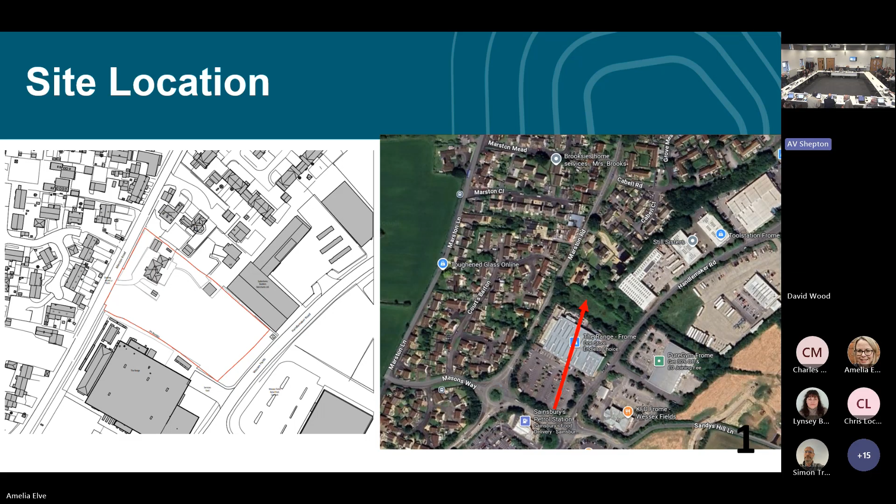In terms of the history of the application, there has been a 2-stage pre-app advice approach taken. The first response related to principle of development, and it was set out that the proposal could be supported as a care home use, would generate jobs, and that any application made should set out the scale of job creation that would arise from the proposal. Additionally, it was confirmed that bed spaces would count towards the 5-year housing land supply.

The second pre-app related to design, amenity and landscaping. Comments from the placemaking team were provided setting out that consideration should be given in respect of the building being fit for purpose, and that the design of the building could be improved through material finishes and form to reduce massing.

Following the pre-app advice, the proposal has been amended to increase the level of landscaping that is to be provided, particularly along the northern boundary. Additionally, elevations have also been amended to simplify the palette of materials, and there have also been changes to the boundary treatment between the proposal and the residential properties to the north.

So just to confirm, the application seeks consent for the erection of a 76-bed care home with alterations to the existing access.

This slide shows the proposed elevations that would face the boundary shared with the residential dwellings and industrial building. The proposal would be for a 2-storey building, with the central block covering the transition of site levels being 3-storey when viewed from the southeast, but appearing as 2-storey from other directions due to the subterranean basement level. The development is proposed to be finished with buff render and stone with some metal cladding. There are a variety of architectural features included within the design, such as around the windows and a staggering of the building to break up the linear form.

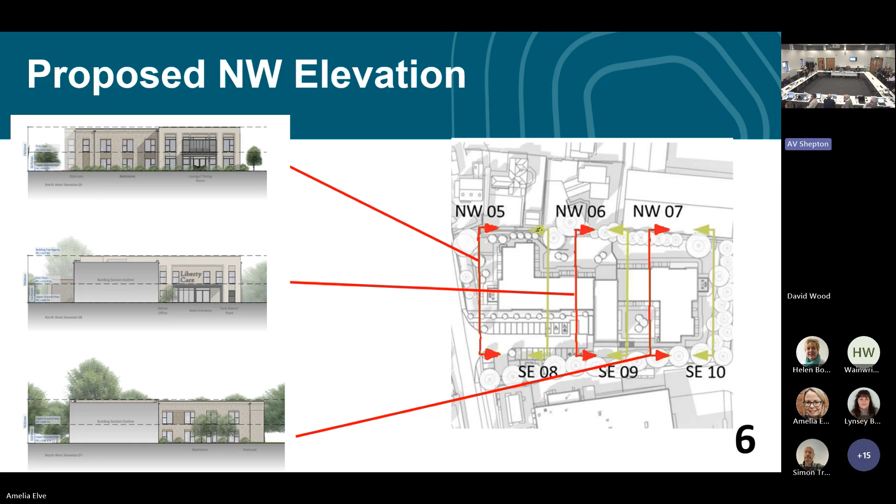This slide shows a series of northwest elevations, from the Marston Road side of the development, showing the staggered layout of the site. The first image is the first view you would see, and then as you move into the site, what you then see. They are sections, so you've got a greyed out area to show where the building form is.

And these are the elevations that face towards the boundary shared with Wessex Fields Road to the southeast. As previously mentioned, the middle elevation is the main view of the 3-storey element, however this is also screened from Wessex Fields given the intervening 2-storey block.

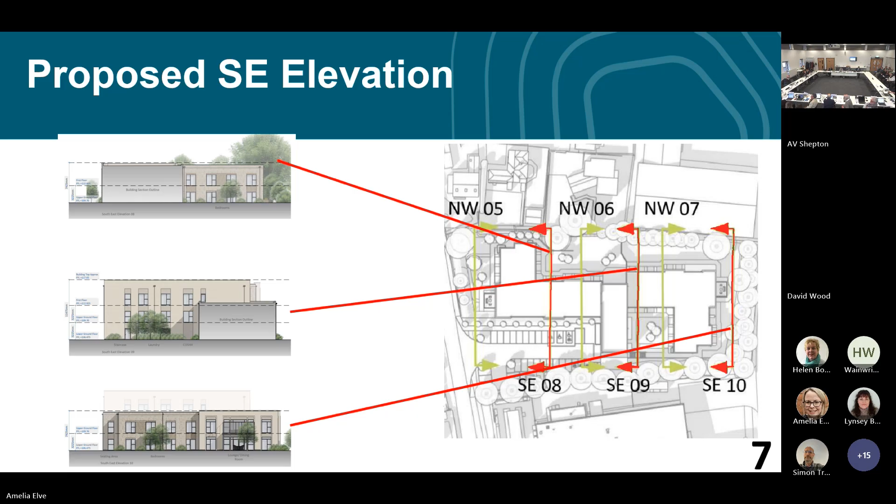We then move on to proposed floor plans. This is the proposed lower ground floor plan that is within the southeast wing of the proposed building. Bedrooms are to be provided along with communal areas and service rooms.

The proposed upper ground floor extends across the entire footprint of the proposed building. Along with bedrooms and communal rooms, a visitor's lounge and residents' shop are also proposed, along with other service rooms such as nurse stations, offices and stores.

And this is the proposed first floor plan, which is located within the northwest wing of the building. Again, communal rooms and bedrooms are provided along with staff rooms.

Site sections have also been provided to demonstrate the site level changes across the site and how the building would be viewed in its context. The two-storey element adjacent to Marston Road would have a maximum height of approximately 7.4 metres, with the two-storey element of the central section having a maximum height of approximately 8 metres. In respect of the southeast two-storey wing, this is proposed to have a maximum height of approximately 7 metres, with the central three-storey element having a max height of 11.25 metres when viewed from that side of the site.

However, as previously set out, this three-storey element is within the main building complex and is therefore well screened from surrounding viewpoints. Also, because of the partial cover over the transition of site levels, it would only be seen as three-storey from that side of that block.

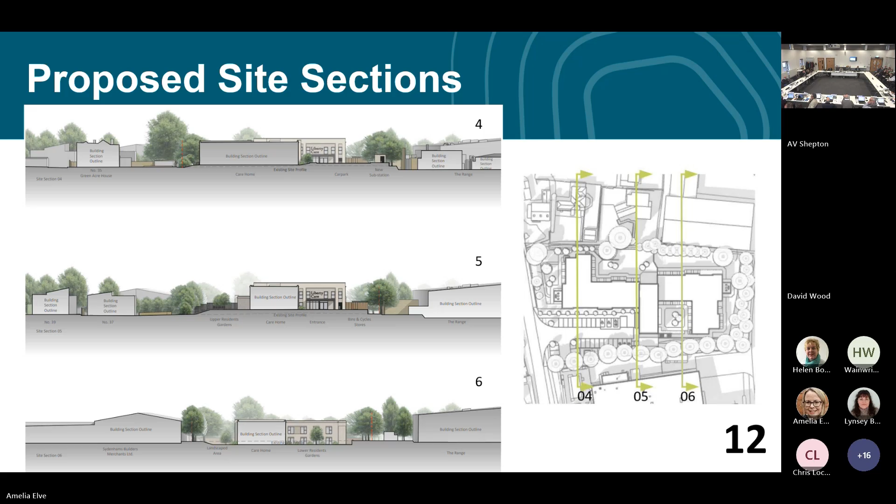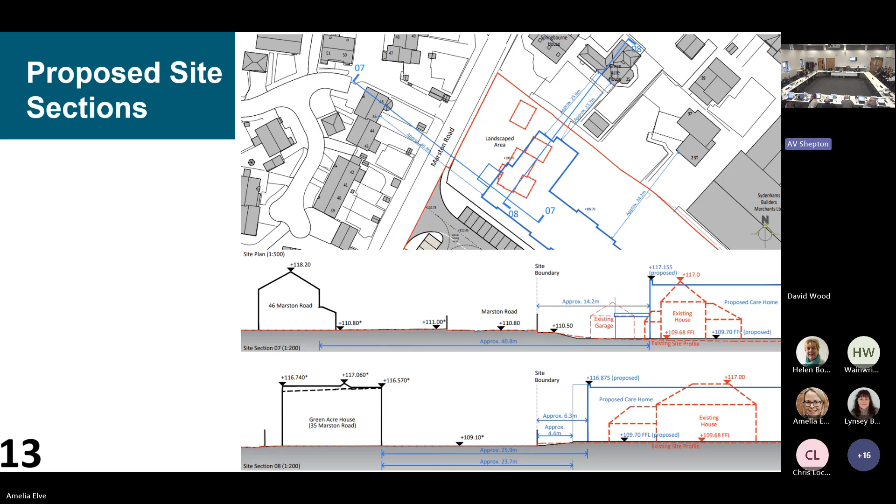Other site sections have also been provided with building heights, including the building height of the existing dwelling, shown in the red dotted line, that is to be demolished. The drawings demonstrate that the proposed building height is comparable to that of the existing dwelling and the surrounding residential properties, both those across the road and next to the site to the north.

Additionally, proposed street scene drawings have also been provided to depict the proposed impact on Marston Road, with the top image showing existing conditions and the bottom one the proposed development.

This is another drawing showing sections to demonstrate how the building would compare to the properties across the road, shown in the top drawing, as if you were on Marston Road looking towards the north. The bottom drawing shows the dwellings adjacent to the site.

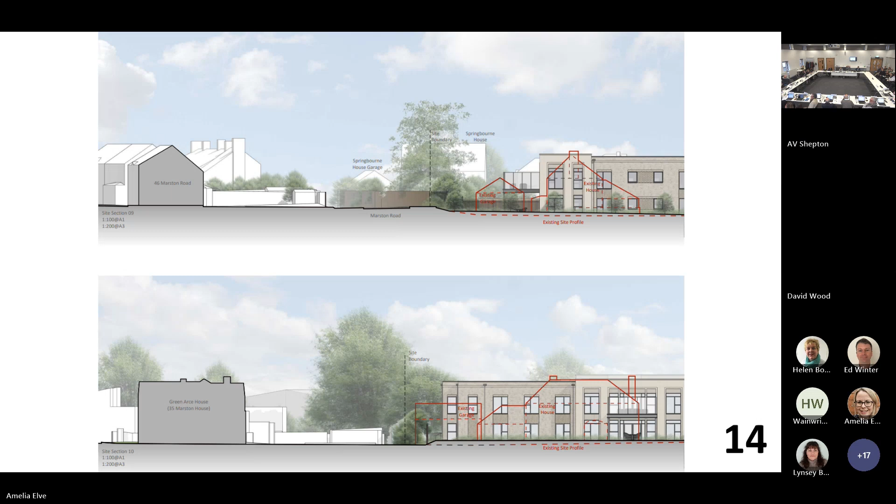We now move on to photos. This is a combination of Google Street View as well as officer photos.

The red arrow indicates the site. You can just about see the house there that is to be demolished for the proposal. This is the view of the approach to the site along Marston Road from the south.

This is as you've gone past the site and turned around to look back. This is the view of the existing site access and the roof of the dwelling that is to be replaced by the proposal.

We now move on to officers' photos. This is the dwelling that is proposed to be demolished.

This is a view in the rear garden of that property looking towards the north and the boundary shared with the residential properties.

This is a view from within the site towards the southeast, towards the more commercial area. A view towards the southern boundary.

And a view from within the site towards the north. Those houses are across the road on Marston Road.

We then got photos as well from neighbouring properties. This is a view from a first floor window of a neighbouring property. The yellow star indicates the property that this photo was taken from.

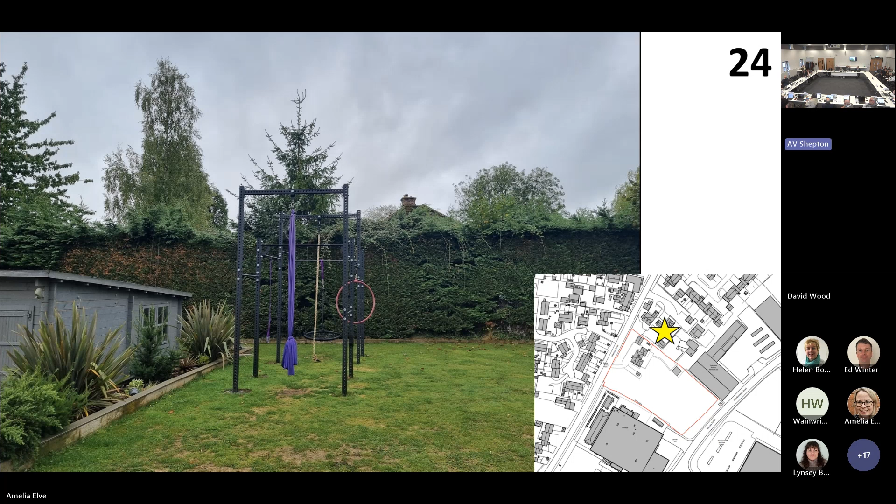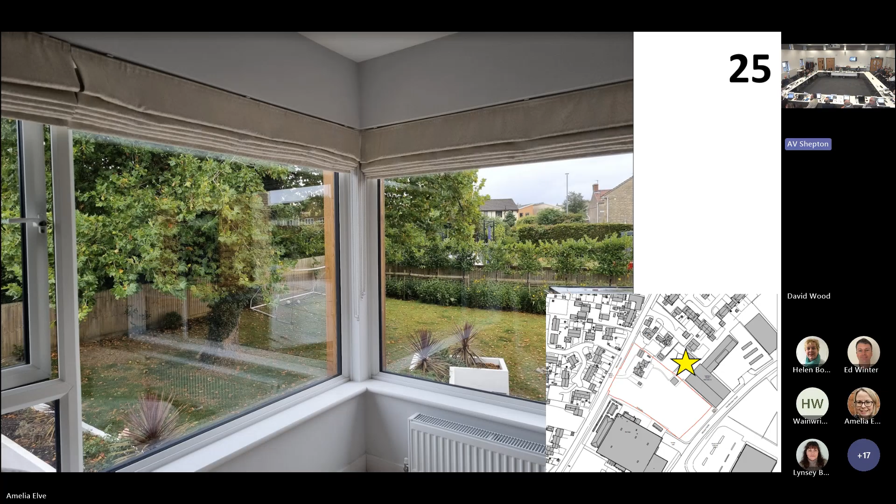This is a view from another first floor window of another property, the next property along. That tree you see in the foreground is protected by a TPO. And then just another view.

And then from the garden of that property as well, again that tree is the same tree that's protected by the TPO.

Considering the principle of development, I've split this into three sections. Local plan policy CP1 sets out that to enable the most sustainable pattern of growth, the majority of development will be directed towards the 5 principal settlements, with Frome being one of these. Additionally, policy DP14 sets out that proposals for care homes or similar specialist accommodation that meets an identified local need will be permitted in accordance with the plan's overall spatial strategy, and that all such development should be accessible and proportionate in scale to the locality.

The application site is within the development limits of Frome. I think that pin's quite small, but it's about there, with the red line being the development limit. It's considered to be in an accessible and sustainable location, and the scale of development is also considered to be acceptable, as set out further in the presentation.

Adult social services have been consulted on the application and considered that the proposal would meet a rising demand for care homes in the area. This is based on current capacities of existing care homes in the vicinity and the demographic of the area relative to the projected growth through to 2035.

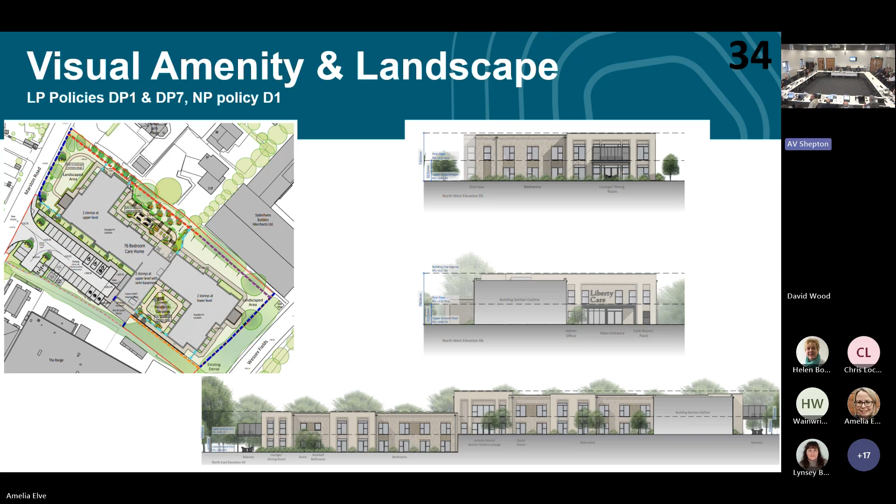Considering further the potential impact on visual amenity, the series of sections provided demonstrate that the proposed height of the building is comparable to the surrounding existing buildings and that of the dwelling that is to be replaced.

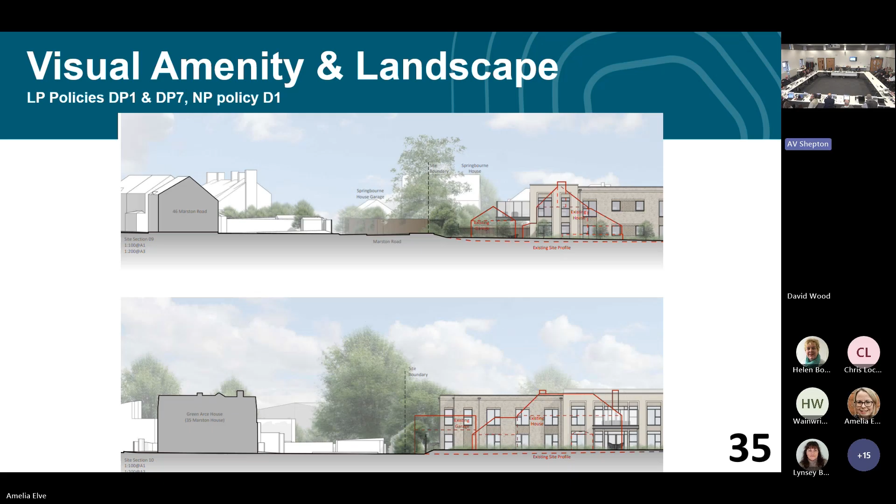Concerns have been raised by some third parties regarding the proposed changes in site levels. Hopefully you can see on the slide that the dotted line is the existing site profile, which gradually decreases as it goes towards Wessex Fields, with the more angular step being the proposed site level.

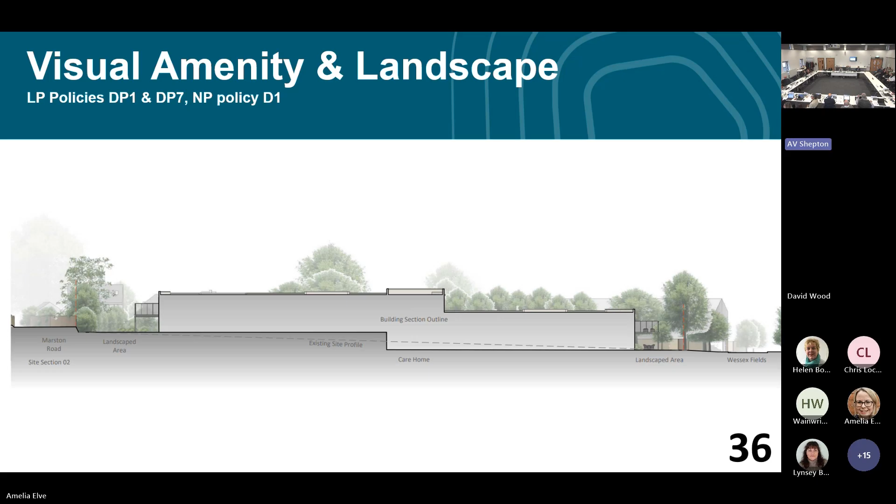The proposal includes a change to the site levels to allow for an angular step down, which would be overlapped by the central part 2-storey, part 3-storey element of the proposed building. This area is where the largest difference would be in respect to site levels, with a maximum increase of approximately 1.65 metres. However, given that this is mitigated for with the central block and the stepping down of the building and site level, this results in a building of comparable height to surrounding properties, and in this respect is considered to be acceptable.

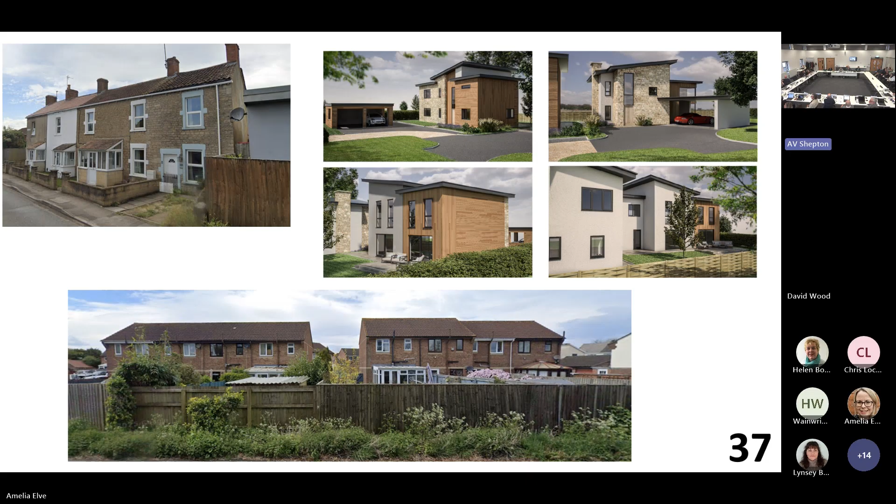Considering the other side of the application site, there is a variety of commercial buildings, including the Halfords Range building to the south, which borders the site, and the Sydenham's building on the other side.

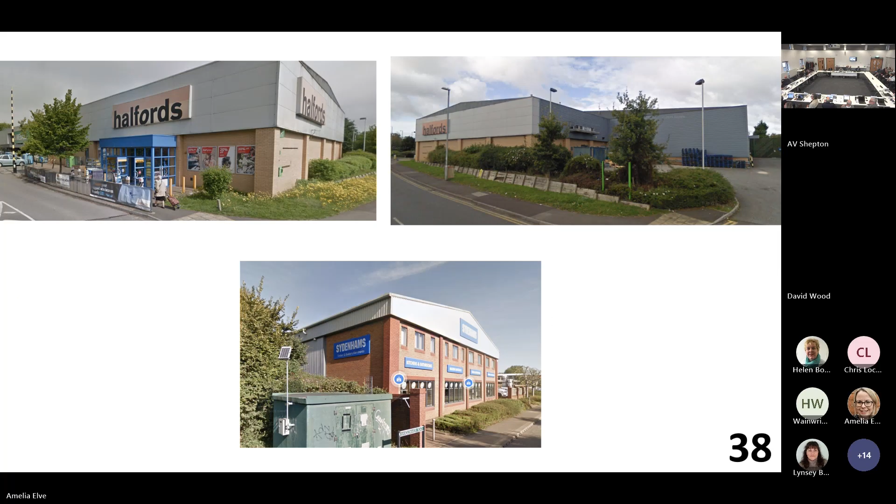Given the local context and vernacular, the proposed use of a flat roof, multi-buff brick, buff stone, and dark grey windows and doors is considered to be in keeping with the surrounding character and is therefore acceptable. Additionally, the street scene drawings indicate that the massing of the building would not be an over-dominant addition, due to the frontages being of an appropriate size and scale with appropriate finishes.

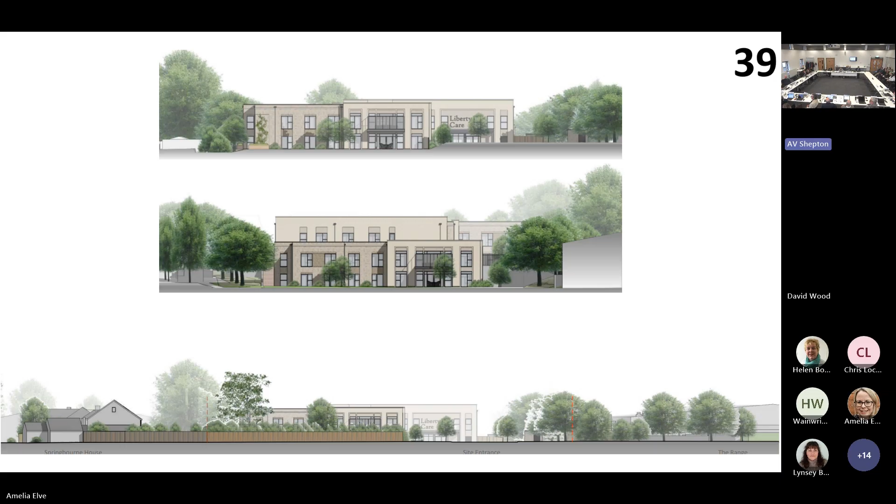An overshadowing exercise has also been undertaken, which will be further detailed in subsequent slides.

Concerns were raised regarding potential overlooking, and the scheme has been amended to remove windows from key parts of the building. If concerns remain, conditions can be used to ensure obscure glazing is provided where required. However, I would note that there is already a proposed condition to obscure some glazing and also prevent the insertion of windows on that wall as well.

A landscape buffer is proposed along the boundaries shared with the residential properties, and a sensitive lighting strategy is also required for ecological reasons, which will have the additional benefit of protecting residential amenity.

Following on from concerns raised regarding potential disturbance from noise, an acoustic fence is now proposed along the boundaries shared with the residential properties, and this is proposed to be secured by condition. A condition has also been proposed to require a privacy screen on the balcony as well.

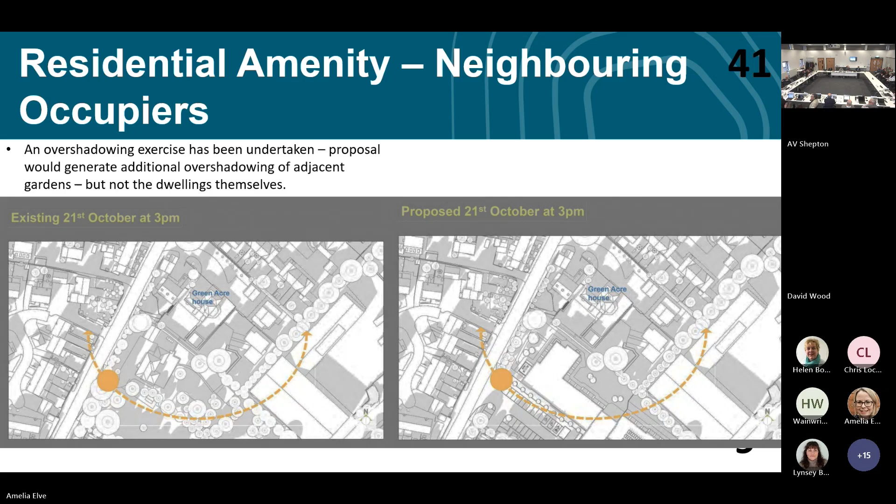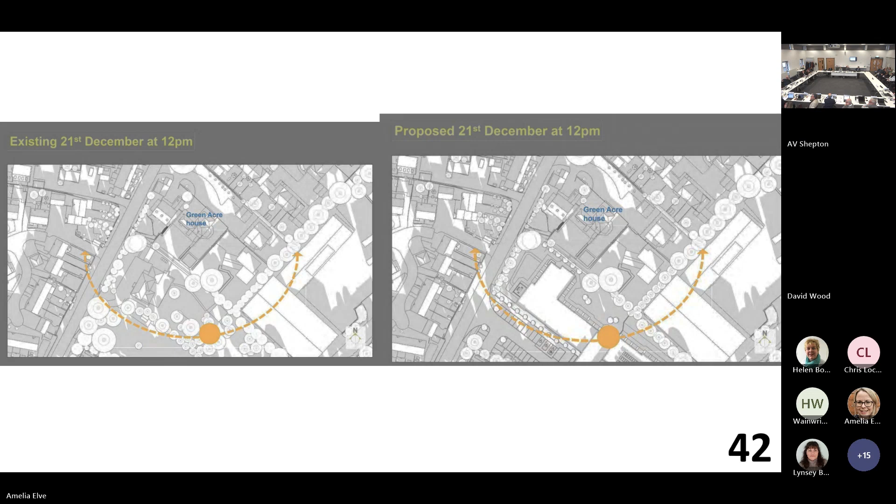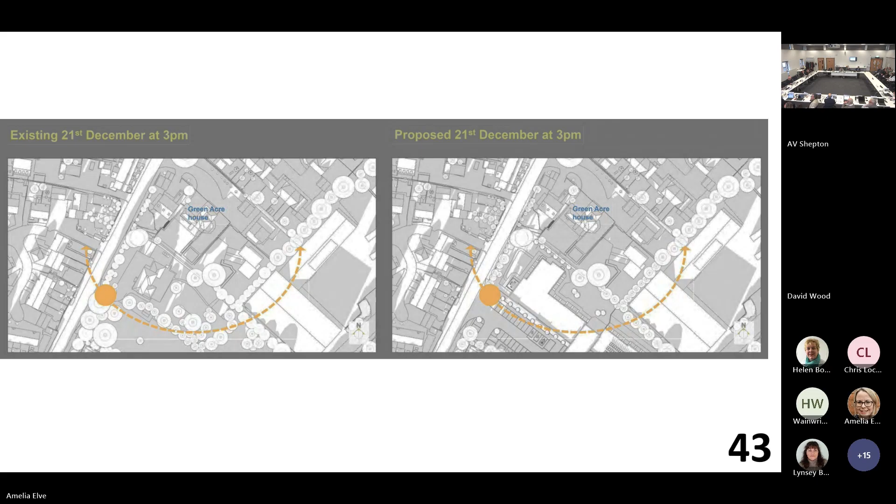This is the overshadowing exercise carried out for the October date at 3 PM. This is the 21st December at 12 PM - hoping that shows, yeah it does. And then this is at 3 PM on the 21st of December. Going to move on.

Considering future occupiers, the proposed layout shows dementia-friendly circular routes and a courtyard area. Additionally, internal noise levels have been assessed and mitigation proposed in respect of specific sound insulation where required. The supporting information sets out that the proposal provides comparable amenity space to other care homes. It's also noted that the proposal has been designed to be fit for purpose and to allow for the care home to function to modern standards.

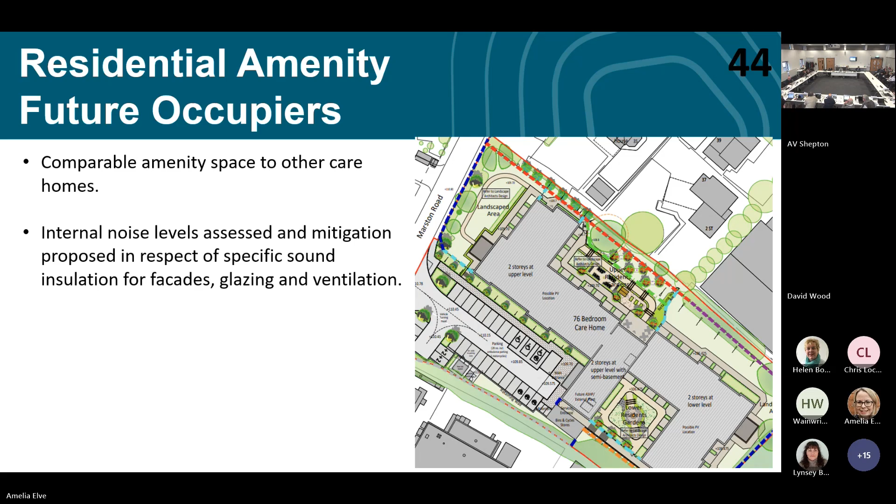Moving on to highways and active travel. The Highways Authority have reviewed the proposal and have raised no objection. The proposed parking provision exceeds the requirements of the Somerset parking strategy, and the proposed access is considered to be of an acceptable standard. The application has been accompanied by a transport assessment, which includes information regarding proposed trip generation. This has been reviewed by the Highways Authority and has not been objected to. Conditions have been recommended to ensure that the access and parking meets required standards, and for a construction management plan.

Further information had previously been requested in respect of the travel plan audit. Amended details have been received and accepted, and it has been recommended to secure the measures and safeguarding sum by Section 106 legal agreement.

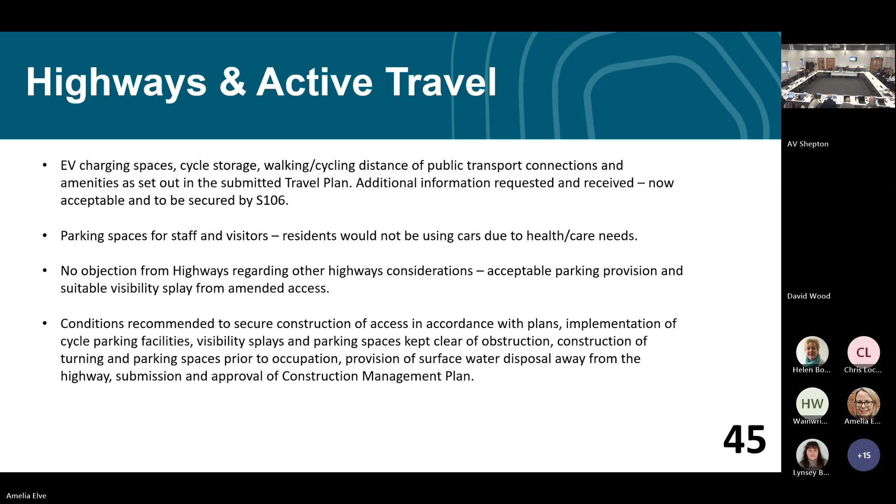Moving on to ecology, the proposal's biodiversity net gain strategy includes both on-site units and the purchase of off-site credits, which can be secured by Section 106. SES have reviewed the proposal and have raised no objection, with conditions recommended to secure appropriate mitigation and enhancements, including a sensitive lighting plan, working method statement, and compensation and enhancement measures as detailed in the reports to be secured: a CEMP, a LEMP, and a nesting bird sensitive construction method condition.

Considering surface water management and flood risk, initially the Lead Local Flood Authority objected to the proposal, requesting further technical information. This has been received and reviewed by the LLFA, resulting in the holding objection being lifted. Conditions have been recommended to secure a sustainable surface water drainage scheme, a plan for future responsibility and management of the drainage system, and a method statement for interim and temporary drainage measures.

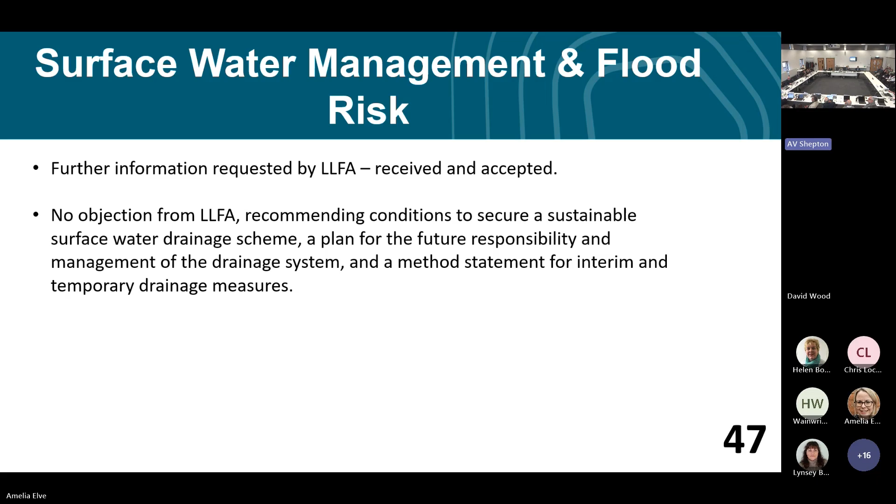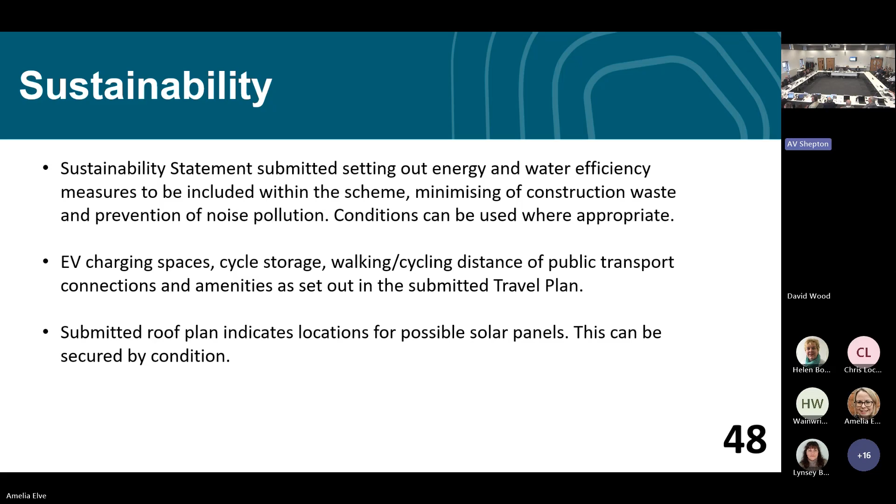Considering sustainability, a sustainability statement accompanies the application, detailing energy and water efficiency measures to be included, and this can be secured as appropriate. The proposal also includes the provision of EV charging spaces, and the application site is considered to be within walking and cycling distance of public transport connections and amenities.

As set out in the submitted travel plan. Considering the proposed Section 106, there are two main heads of terms: to secure the BNG measures and the implementation and monitoring of the travel plan, with a fee of £2,000 and a safeguarding sum of £25,600.

Therefore, the officer recommendation would be to support the proposal, given the principle of the development is considered compliant with relevant local and national policies, and there would not be a significant unacceptable adverse impact on visual amenity, residential amenity, ecology, surface water management and sustainability. Also, there are no objections from technical consultees. It's considered that appropriate mitigation measures could be conditioned and secured by Section 106 planning obligations, and that the benefit of the scheme, providing equivalent to 35 dwellings and specialist accommodation that is needed, outweighs the potential harms of the proposal. Thank you.

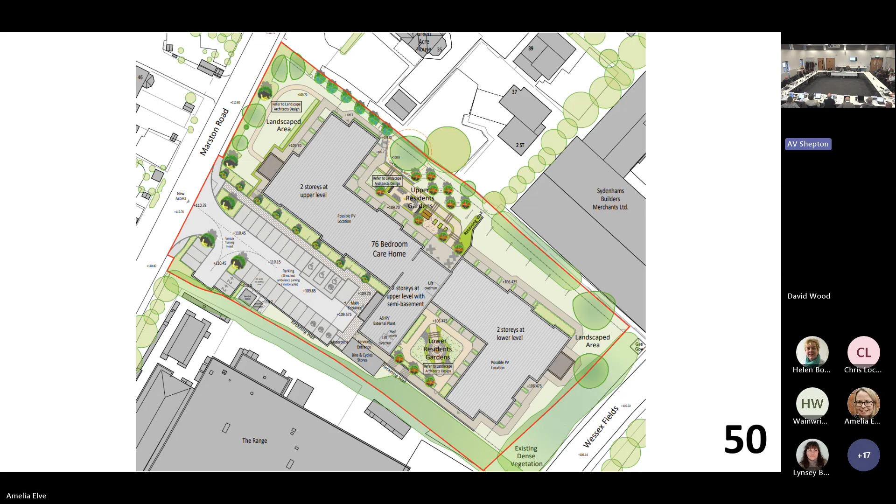Right. Thank you, ladies and gentlemen. Can we call the meeting back to order? Helen, do you want to kick it off again? We have everyone back in the room, as far as I can see. Thank you, and welcome back to people online.

We got to the end of the 10 speakers on this application, and I'm going to ask the officer for any clarification, factual clarification or information before we open it up to members.

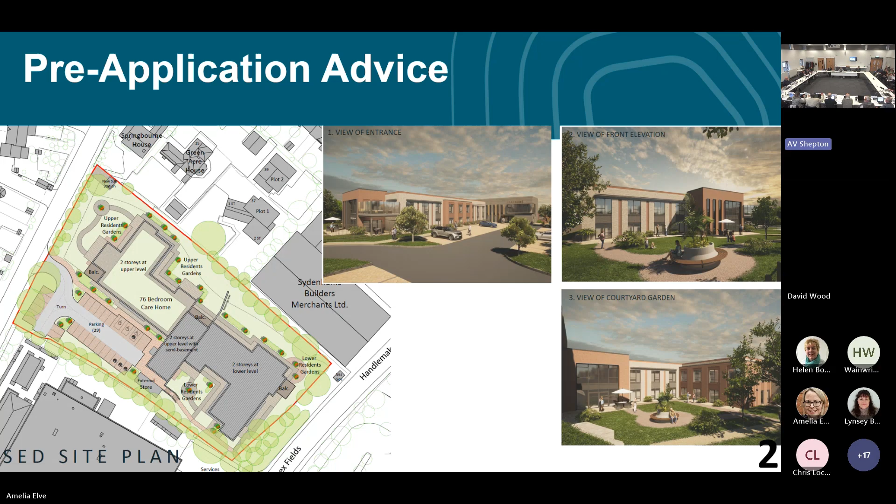So I was just going to come with a few points of clarification. The main concerns we heard from the speakers were about residential amenity, size, scale and massing of the development, and the proximity to the boundary.

In terms of the layout, members can see there's a bit that projects close to the boundary at the front as a wing. The rest of it is then more centralised and projects to the back.

Looking at the bit that pokes out closest to the boundary, paragraph 12.3 of the committee report sets out separation distances. The bit closest to the boundary is 4.4 metres from the boundary, which for visuals is approximately from this wall over here to about the edge there. That's the separation from the boundary.

In terms of the separation from the back of the nearest residential house, the distance is 23.7 metres. For information, this wall to this wall over here is 12.4 metres, so you're looking at almost double that for the separation in terms of window to window.

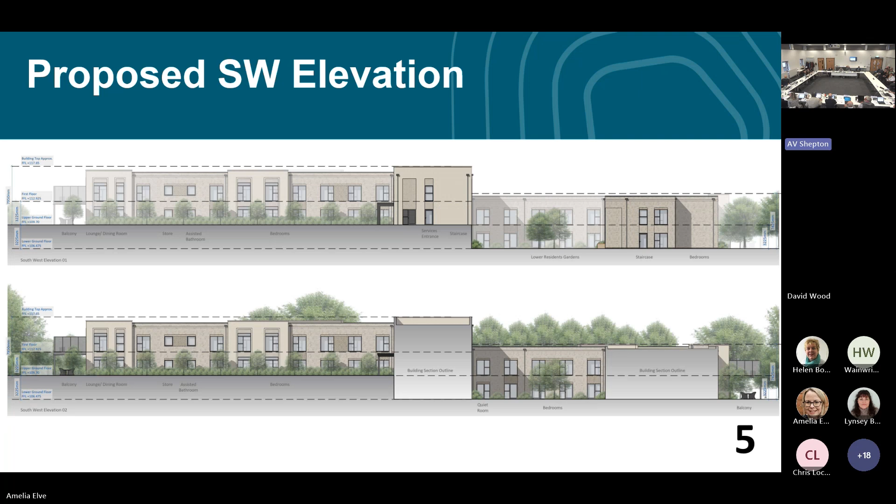On this elevation, there aren't any windows on that closest bit. So on the top image, the thin section that you can see is the nearest section to the boundary. There are no windows on that bit.

On the bit just forward of it where you can see a window, that's on one of the step-ins. The position of that relative to the boundary is 6.3 metres, and that's controlled by condition to be obscure glazed, so not allowing any direct views through. There's also a condition to restrict any additional openings on that bit of the building.

On the rest of the building, the separation distance from that elevation where the obscure glazed window is, is 25.9 metres to the rear elevation of the neighbouring dwelling. So that gives members an idea in terms of the separation distances.

I think the other point raised was in terms of employment. You've heard both sides - it is an allocated employment site, it hasn't come through for an employment use. A B1, B2 or B8 use relative to neighbouring residential properties wouldn't be ideal for those properties, so we'd have to assess any application on its own merit.

A care home does offer a degree of employment in terms of its use, and from an officer perspective we are more comfortable with that as a kind of hybrid employment use relative to the neighbouring properties, relative to the commercial use next door.

I think the other thing we were going to cover was internal layout, because there was some discussion about how big and how long some of the corridors were. It's just loading, bear with.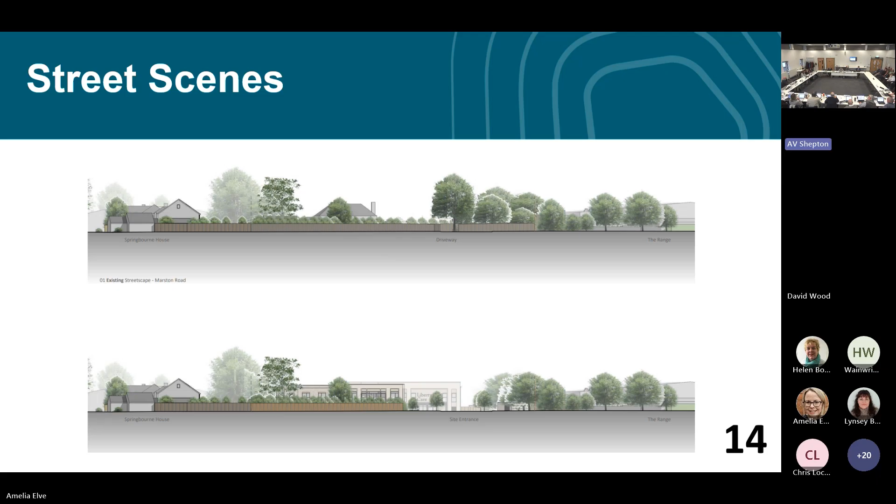Councillor Lovell, related question. Thank you, Chair. I've had a bit of pushback about suggestions that the inside design is cramped for the purpose. Could we have some clarification as to the nature of the design, the size of the rooms, the aeration element within the space, and how that compares with other homes? Thank you.

Thank you. So, as probably mentioned by the agent in their three minutes, this has been designed by a team who design care homes, so it has been designed with the end user in mind. I understand there's a lot of standards and rules that have to be met for a care home to be considered acceptable. In terms of the size of the actual bedrooms, they've got ensuite facilities, also access to a range of other facilities within the building. There's options to move around the building as well as outside in the courtyard area.

Did you have anything to add? I was just going to say, in terms of the room layouts, per wing it's set out within the report, in terms of all the different uses that are available. As mentioned earlier, it's per block.

So that L-shaped block on one floor has all the facilities for that floor. The purple section in the middle is the main entrance with some ancillary uses. That L-shaped block at the back is another set of self-contained units and dwellings.

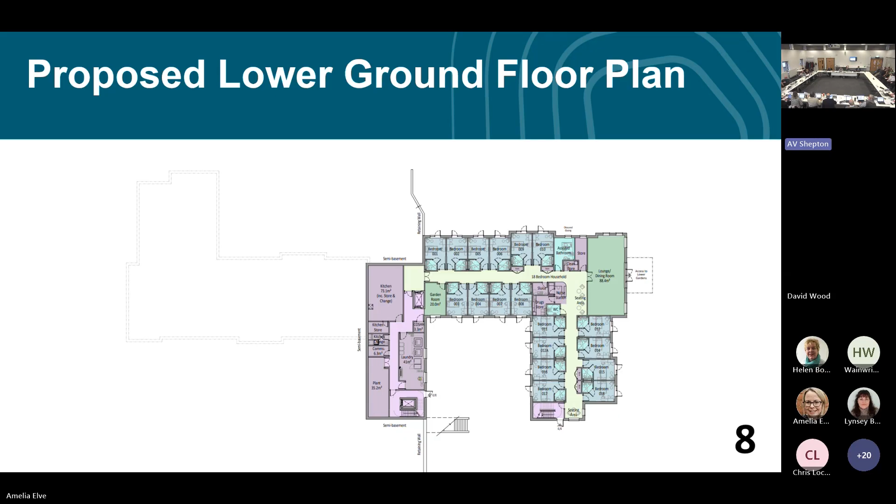They've all got en suites. Both the front and rear blocks, at first floor respectively, even though one's at first floor from the front and one's effectively at ground floor if you're running a straight line through, have modest balcony areas. There was concern from the neighbours about the balcony area on the front, so its position is quite significantly further back from the boundary than the projecting element, but a privacy screen was still agreed to go on there.

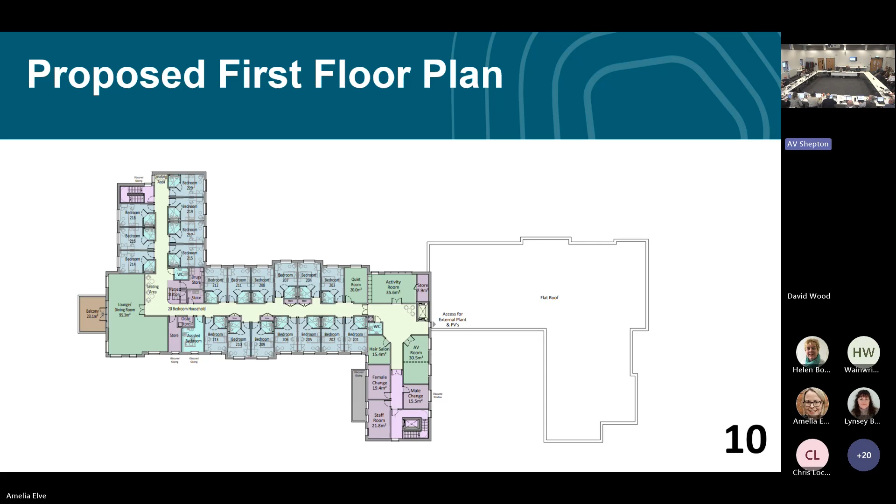If you can go to the layout again quickly, there is also quite a lot of description within the report about the amenity areas, the garden areas, the paths, and the different breakout garden spaces for them. Because of concerns about disruption to the neighbours in terms of use of those outdoor spaces, there's also a plan provided that gives a section through that element of the site with a noise attenuation fence, to try and minimise any disruption for the neighbours from use of the kitchen gardens or the private quiet spaces. But there are a number of informal routes around the building that could be taken for a bit of fresh air - a nice circular route to aid dementia patients.

The description of that, and the description of all the facilities per block, is within the contents of the report. If members have any particular questions, we're happy to take them.

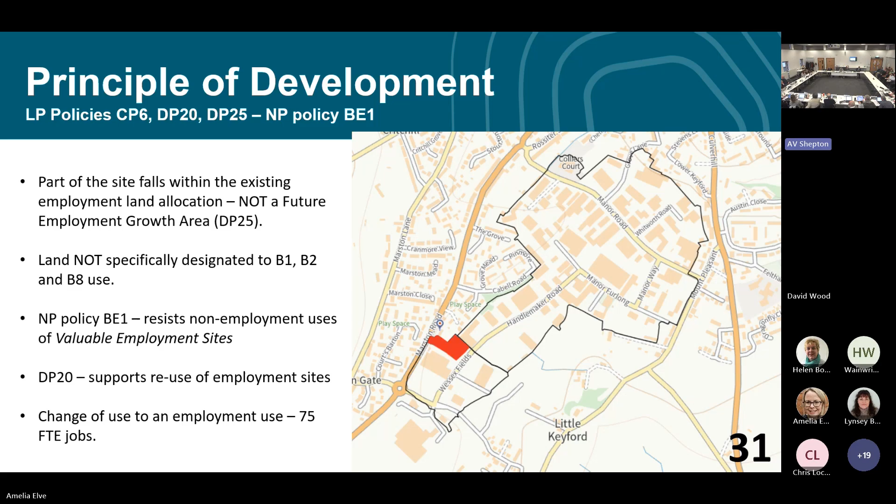And in terms of why here, if we can do the previous slide as well - so that's the settlement limits for the area, and there's a bluish pin, quite a small one, just halfway down the main road, that's it. Within the policies that do support care homes, it encourages them to be in sustainable locations within one of the main areas for growth. Frome is a sustainable settlement, it's well connected within the settlement, so therefore on that principle basis, the location was considered acceptable for the care home.

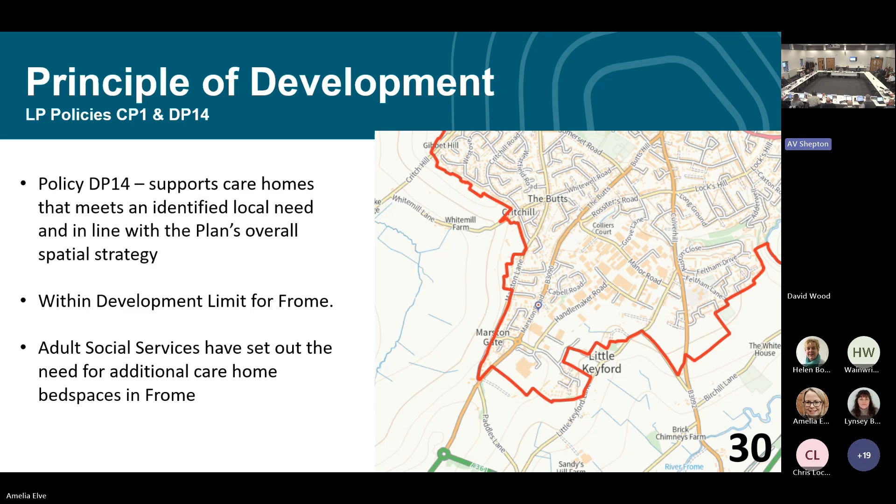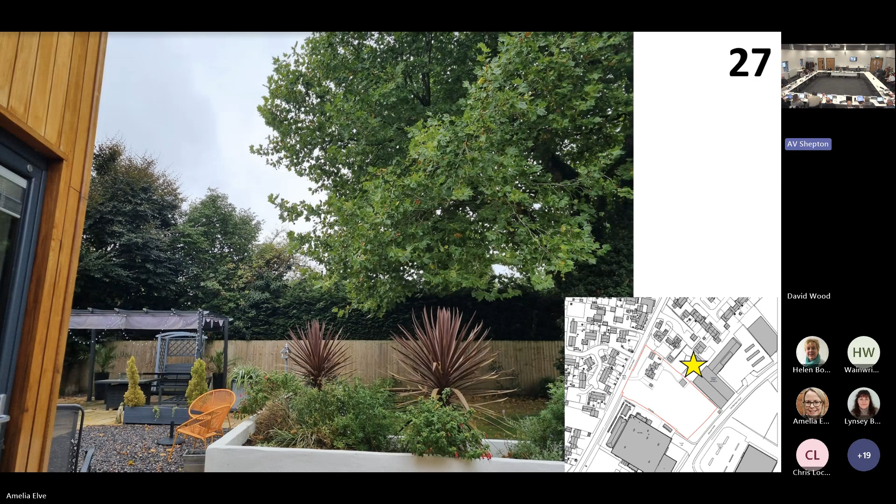Thank you. First point on overbearing on number 35 and the house on the corner, which was shown in slide number 23. I understand that at the Frome Town Council meeting, the applicants were going to provide mock-up photographs of what the view would look like, just to the right of that, but they haven't come about. I do take the point that if the view is going to be about to the height of the bottom of the chimneys and it's going to be long, it's quite a different view, adding to which the tree on the left is obviously going to have no leaves in winter. So I think it's made it a lot more complicated without a proper mock-up of what it looks like from there.

My second point really is on the need, because as I understand it, DP14 states that care home proposals must meet an identified local need, and I'm very muddled.

You say in your report on page 9 that Adult Social Care says there's a need for beds. To quote, it says the data suggests the addition will help meet rising demand from an ageing population, but local consultation is necessary to ensure it benefits the community. So I'm not clear if that local consultation has been done.

I do note the report from RAP, who are healthcare providers, a quite detailed report looking at the other care homes in Frome, showing their level of capacity, which ranges from 77% to 87% depending on which one. But they do note that the Frome Care Village is undergoing a £10 million refurbishment with an extra 60 beds.

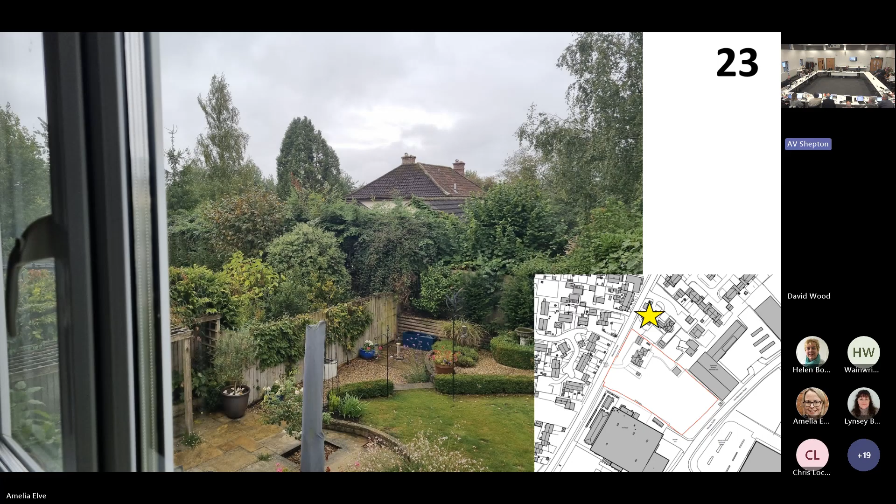Thank you, okay, thank you. Councillor Denton. Thank you, so I live next to a care home - goodness me.

So I live next to a care home, which is about 20 meters away from our back garden, actually closer than that. Thankfully we have a hedge which is 3 meters, well, 3 stories high, which was planted in 1984, so we don't have concern because of this evergreen hedge. Now on the other side of the garden we can see into their windows, and they could see into ours. In winter that makes it more obvious because the lights are on and there are no leaves on the trees. So we do have a problem with that, and I can totally understand where the residents are coming from, because it is a real concern.

Having said that, we've got used to the building being there because it's been there now for over 15, 20 years, well, about 17 years. So it's a real concern.

I also often look at things when people say, why are we making provision? Why are we waiting until we have an emergency? It's a bit like the highways, why don't we put the stop sign in there before people die? I think it's the same here. We've got a higher than average population in Frome.

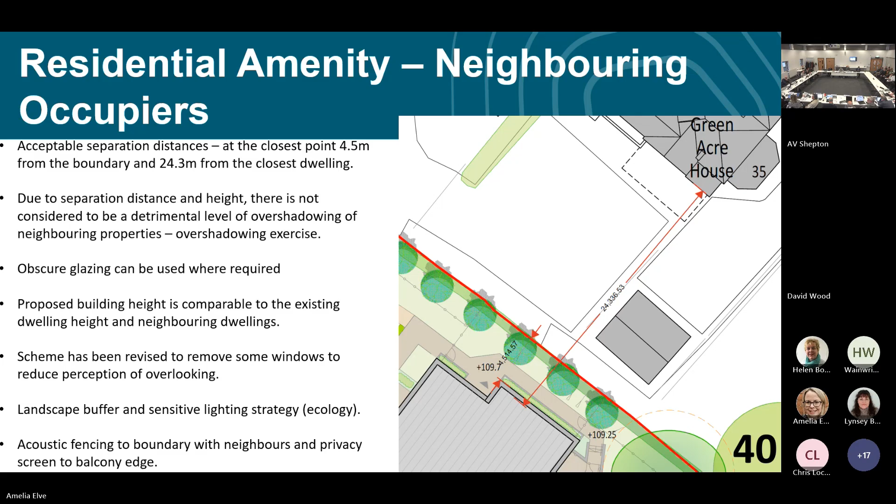Yeah, again, sorry, we're skipping around all the slides to try and show you everything. Which, okay, is this one. So this darker section below that bit, that's the other elevation that's facing the neighbours.

And again, window to side elevation. So it's not window to rear, it's window to side on the neighbouring residential properties. And that's in excess of 24 metres in terms of separation distance.

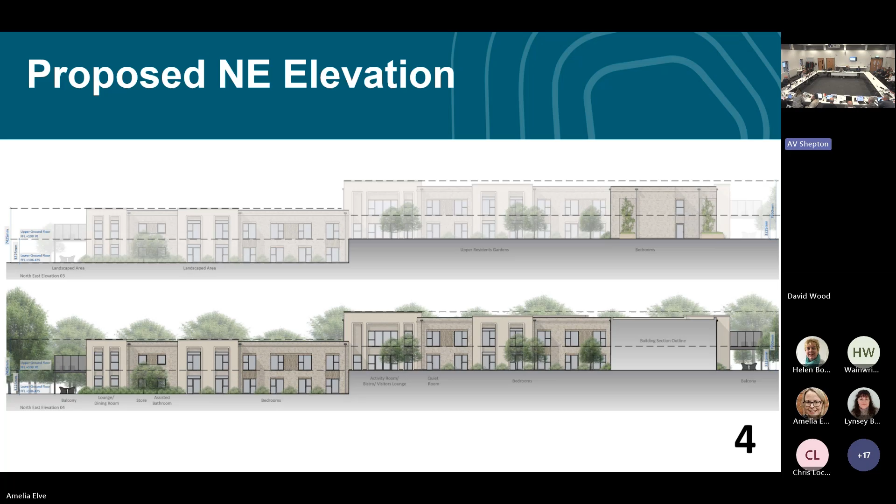Okay, you have a response about the wall in the northeast corner. I think the question from the town council was actually about taking out 2 trees. So if you go to the site location plan, sorry, skipping around, they were talking about the 2 trees in that top hand corner coming out.

I guess I will push that to members. From a landscape green perspective and protecting the privacy of future occupants, having a nice little enclosed path walking around the building for them and offering a degree of screening to the building from the wider vicinity, officers were quite happy for them to stay in.

It wasn't proposed to be taken out, but the request was whether it could come out because they would increase light, I think, to the neighbouring garden. But it's those 2 trees, I think, in the top hand corner.

Okay, thank you for that. We've given this application the best part of 2 hours now. Could we now move to a vote, please? Could I have a proposal in front of me?

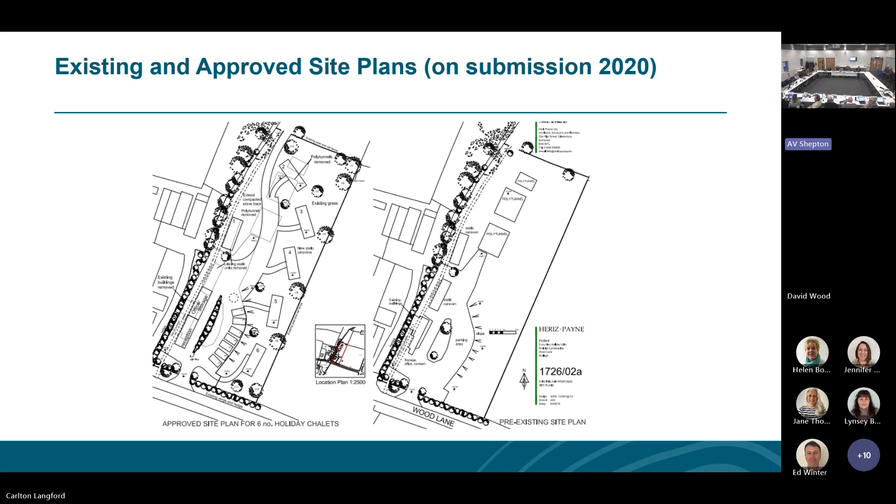So this plan relates to the application, for the 3 gypsy traveller pitches on the site, 2 down the left-hand side and 1 at the back, and some landscaping, etc., maintaining the office structures with regard to the landscaping business.

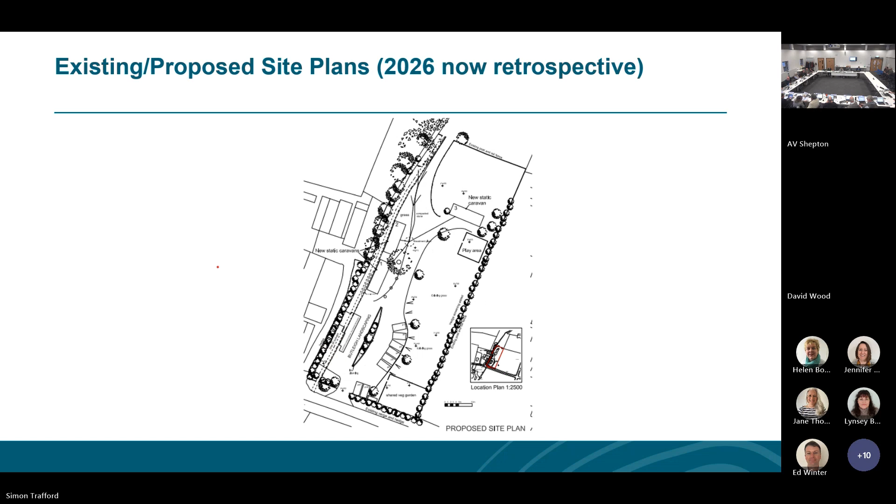Thank you. Right, so after the last meeting, we went back down to the site and had a look around, and things were raised at that meeting with regard to whether the septic tank had been installed and whether there are other buildings on the site. You can see the left-hand photograph shows where the septic tank has been installed.

The top 2 photographs show the siting of 2 shipping containers, one of which is being occupied by a single gentleman. Towards the back of those containers, there's also a type of structure being used ancillary to the domestic uses on the site. Could you speak up, please?

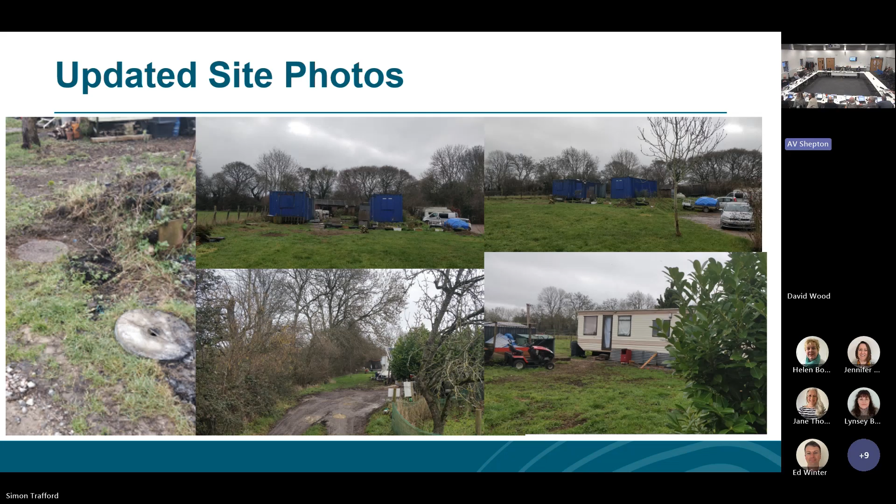At the last meeting, these are the reasons that you asked us to go away and investigate further, with regard first to the package treatment plant having been installed. The applicant has got back to us with a photograph showing a tanker recently on site emptying it.

So we can clearly confirm that it is on site, being used, and being emptied from time to time. Also, you wanted clarification on the status of the containers referenced on the site - those photographs I showed you earlier, the 2 blue shipping containers. Following our inspection, 2 20-foot containers have been installed on site, one currently being resided in and the other used for ancillary domestic storage.

A further domestic shed structure was also being used for domestic storage, observed on site and again not on the proposed plans. The applicant's agent has confirmed that these structures do not form part of the current application, and they've instructed their client that they will seek separate planning permission for their retention.

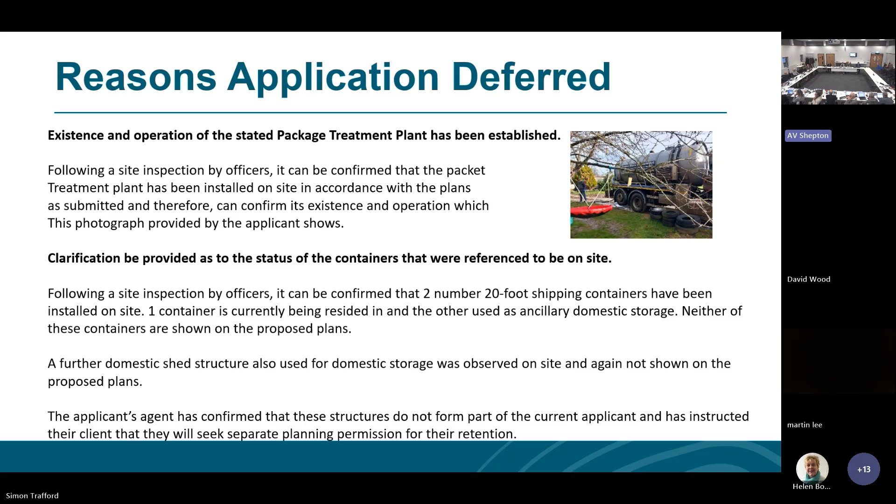Since the last submission, bearing in mind the situation on site, we've added 2 additional conditions to the original recommendation. The first is that we couldn't rely wholly on the landscaping previously approved under the extant permission, as there seems to be a problem with horses leaning over the fence and eating it as soon as it's planted. So they'll need to come up with a scheme to present to us to ensure this doesn't happen in future, and hopefully the hedge along the eastern boundary can grow, flourish, and become a landscape screening.

Also, with regard to the blue containers, we've suggested that any structures not indicated on the plans be removed from the site within 3 months of the decision - just to make that clear and alleviate any concerns that members had.

So the recommendation is as before, subject to the addition of those two conditions I've just spoken about. We're recommending approval in accordance with all the other conditions as well.

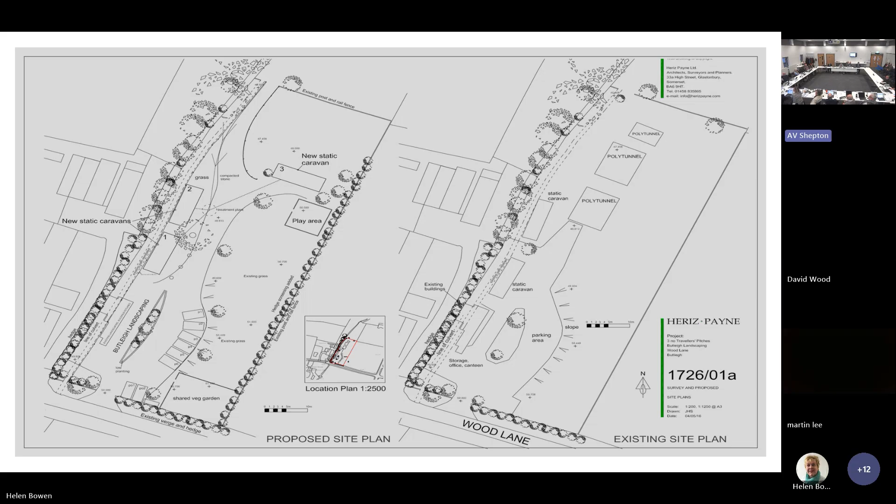A few points I'd like to make and a few things I'd like to correct in your officer's comments from last month's meeting. Mr Langford put forward the idea that approving this application would reduce the number of caravans on site from 6 to 3, with the effect of reducing the load on the septic tank. Clearly he has not read his own report - in section 14.4 it states 3 pitches, each with 2 caravans, so still 6. It makes no difference if the caravans are mobile or static; the occupants still produce the same amount of waste, so no improvement.

Has the septic tank been fitted correctly as per section 8.13 of his report? No. As per David Charland's email, which you have all received, the tank discharges into a stream, which is illegal. There is no drainage field as stated in the report, and no technical details provided by the applicant.

In spite of saying they want to fit in with the community, the applicants have not improved the site in the 5 years they have been there. In fact, it's worse now. So will they carry out the necessary work to comply with their application?

Of course not. They have already broken the terms of their application by illegally siting the 2 blue containers which they live in. They have also added to the accumulated rubbish on the site. I believe they will continue to act with impunity if you approve this application without some strong and enforceable restrictions.

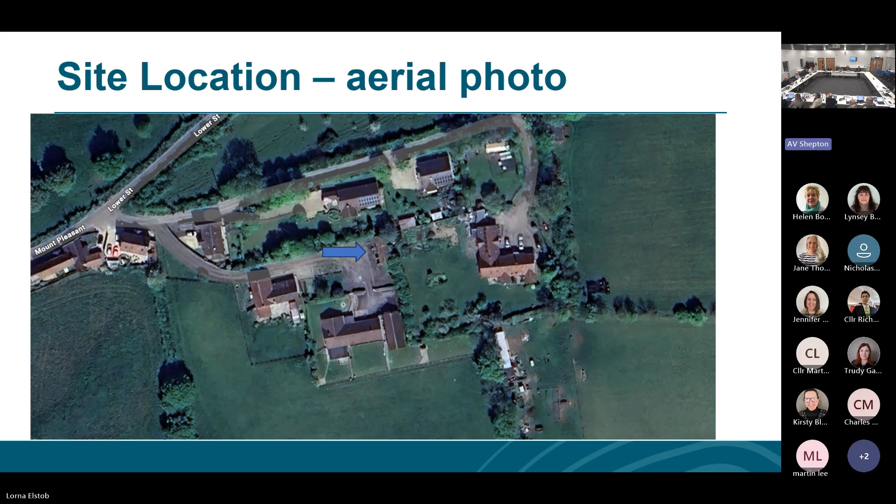So just to give you an aerial view there with the blue arrows, the existing coach house is within the cluster of residential properties there. This gives you a bit of better context. So the coach house is actually, I don't know if my cursor will appear, that small building there, Sutley House being within the same ownership, hence why it's included within there.

And there is the shared access. Also there is a legal right of access across that for, I don't want to mispronounce it, but the dwelling just outside the red line.

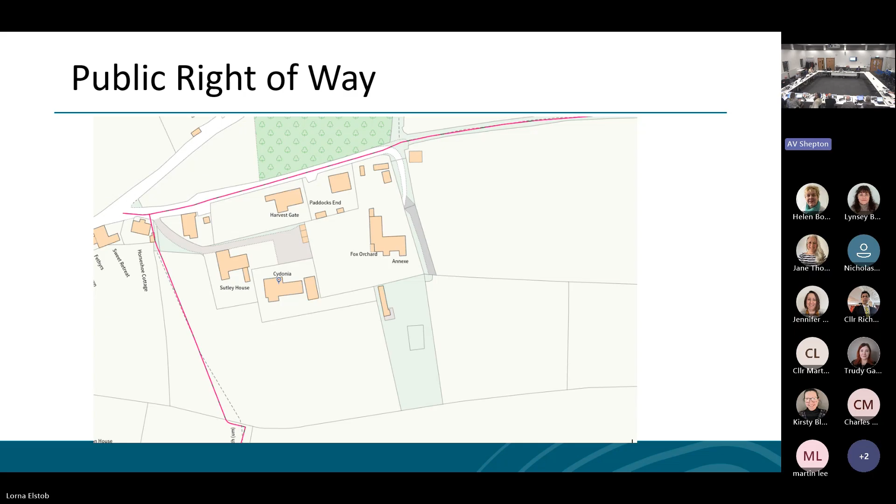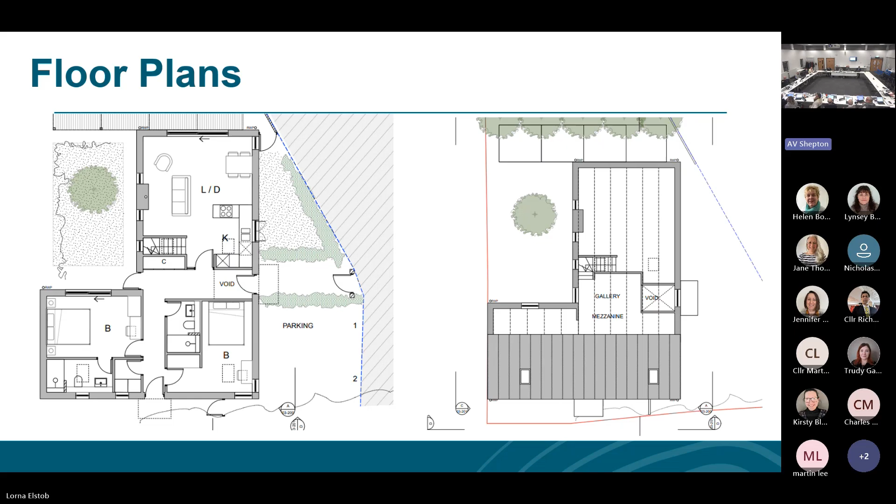So just to the context of the floor plans here, so we have a mezzanine, but it is designed to be an office space upstairs, and although that shows it as full width, the actual working space of the mezzanine is sort of restricted to that square where the word is. Most of the living accommodation and bedrooms are on ground floor level, just that working space on the mezzanine there.

So where you look, the blank wall with the little circle is the bit that's against the boundary. It then steps back, so where the windows aren't up against the boundary, they are set back from the boundary. Just for clarity, sometimes the drawings aren't as easy to visualise, so just some photos.

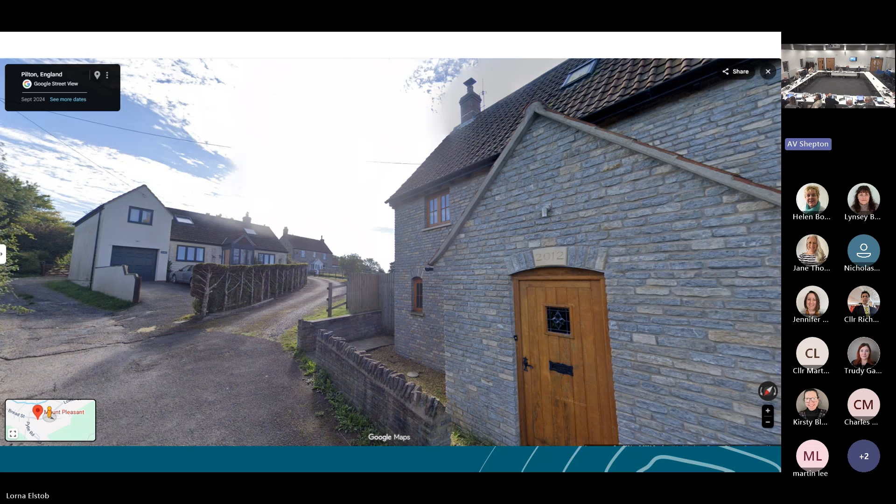That was part of the application, just so I include those for you to see. So as you enter the site off of Mount Pleasant, the driveway to the right-hand side is where you would go up to the site. There are other properties that are accessed to the left of the white gable end building there. So these were actually taken this morning.

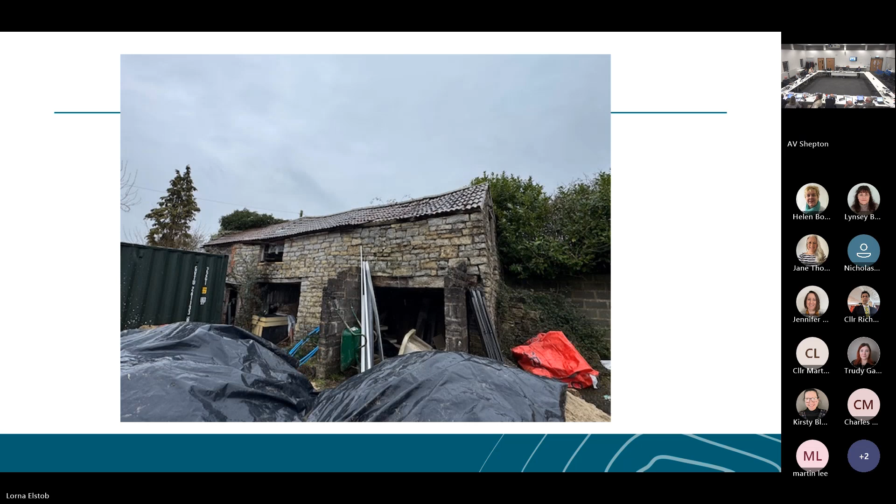Bear with me. That just gives you a bit of an idea of the structural integrity, or lack of, in the building. In the background of that, let me get—is Fox Orchard that you can see behind the tree line. And then looking to the other side, that is Harvest Gate. So that reference is in the report.

So they're taken from on the corner of the existing building. Just another one to show the general condition. Where possible, we like to convert. Sometimes it's just not viable, but if we can reuse the materials, that's always a good thing.

Just for reference, and I apologise, this wasn't included in the report, there is an existing planning permission on the site for a bungalow. So that is what the existing permission—it was granted in 22.

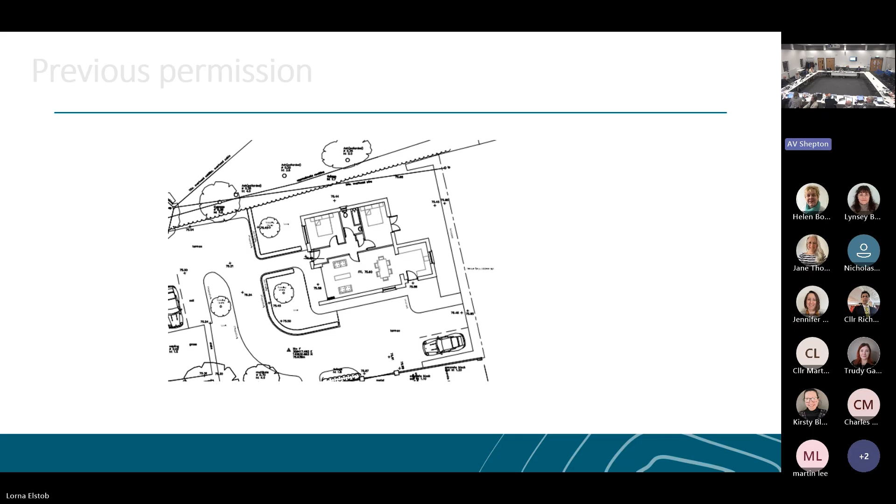So my recommendation is for approval. We're looking at some conditions with regards to sensitive lighting. There's a comprehensive ecology report that has been submitted, and there are clear recommendations which we would look to be complied with. The works do require a protected species licence, which the applicant and agent have agreed to the pre-commencement side of it.

And we want to ensure that the parking that is proposed is retained so that it doesn't impact on the other properties and that the right of access is retained. So we wouldn't want those to be swallowed up and used as anything else. So we've asked to ensure that before the dwelling is occupied, those spaces are available.

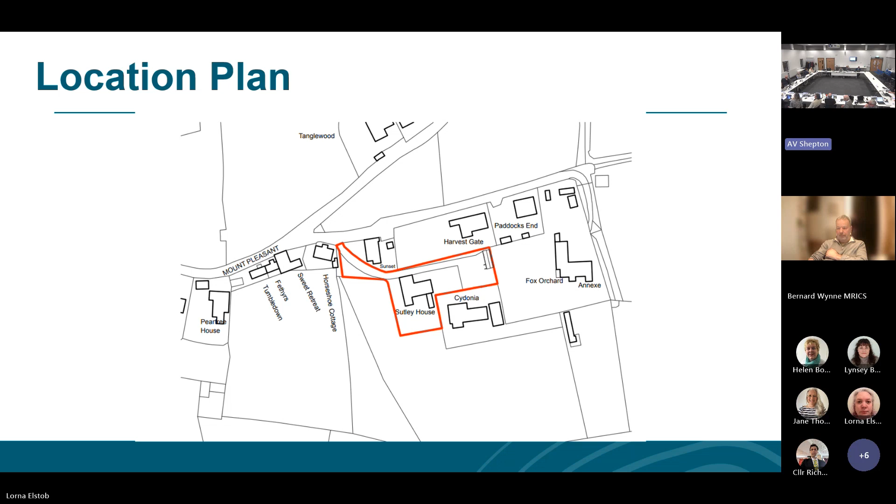So what's the orientation of the L-shaped building to the adjoining properties? So there you go - let me get the right property names. Fox Orchard is where you've got the end of the L sort of facing to your left there, where it is flush to the boundary like the existing building. To the top of that plan is where you've got the access into Cydonia, and to the bottom of the plan - just want to get the right house name. I'm sorry, this is quite confusing, I think, for people.

So what you're saying is that the courtyard of the L shape is adjoining the boundary with Cydonia? No, Cydonia is to the north - that's where the shared access is with Cydonia. At the very top, where you can see a gate, that is the access point into Cydonia. To the left is Fox Orchard, and then to the bottom - so north is on this gate. Thank you, I was searching through. So to the bottom of the plan is...

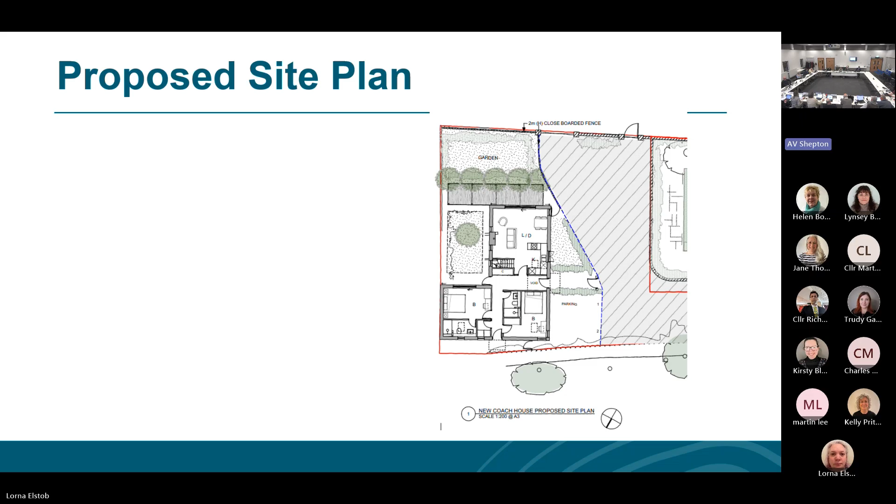Okay, does that really answer your question, Martin? No, it doesn't. I could happily make a decision based on knowing what that difference is, because that is a clear thing about the impact. Yeah, okay, perhaps we'll give the officers a chance to provide information. We will go to Councillor Lovell next.

Councillor Reid, sorry, and then I've got Carswell. Thank you, Chair. A question first of all if I can. I know Pilton very well, of course, but what I shamefully don't know is whether it has a conservation area. Could you let me know that? It does. Are we in the conservation area? Oh well, perhaps we should be, because we're right in the heart of the village there.

The two main concerns that have come up are the size of the application. Could you compare this? We've been told it's 2.5 times the size of the building that's already there. Okay, the old coach house has to come down, I think we're all agreed with that. How does the new application compare in size, in ground size, to the application that's been approved already? Is it bigger than that?

And there's the other one, of course, is building materials. It doesn't look as though the same sort of building materials fit in with what is the heart of the village already. So I'm rather concerned that they are inappropriate.

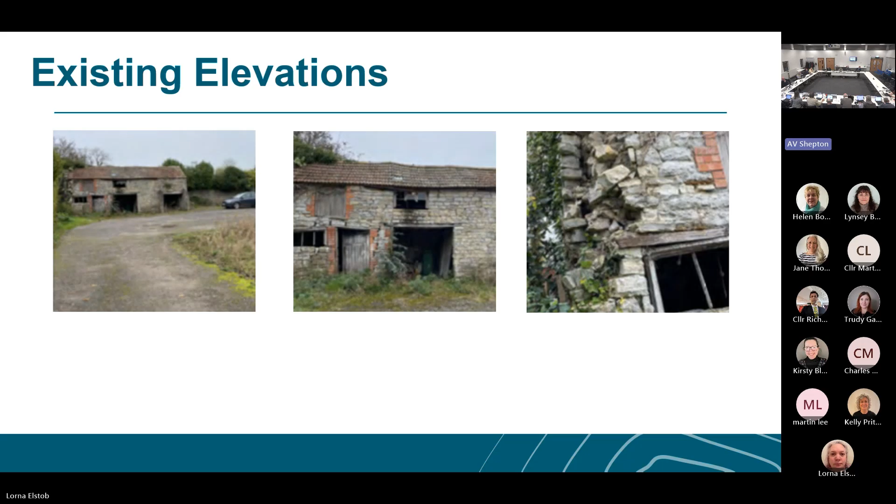If we're knocking down the stone barn anyway, there's plenty of stone to rebuild. So I wonder, could we have an answer on the size, please? Bear with me, I've got to go into the system to actually measure it. But just for clarity on the materials, the principal elevation does reuse that stone.

Right, I've got Councillor Denton, Councillor Carswell, in that order, I think. Oh, that's from here. Does that work?

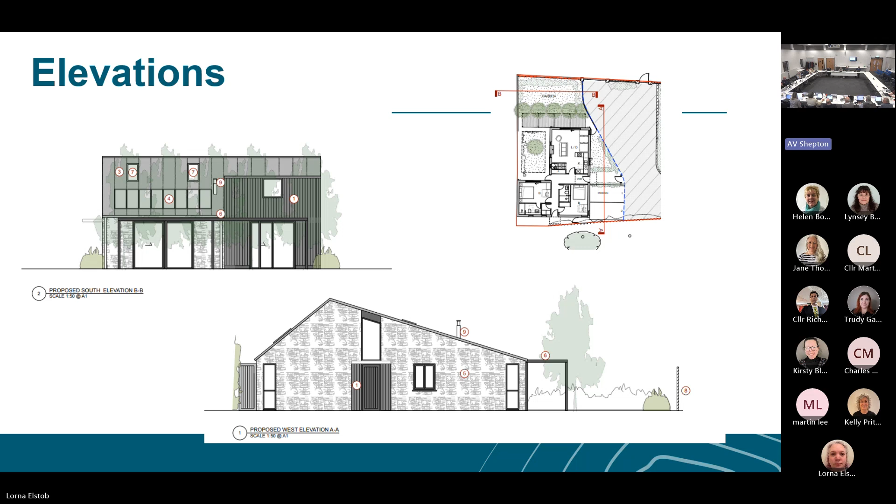So what is the legislation on increasing footprint? Is there any legislation on that? Because I know that we've been told before that a piece of land has, the house cannot fill the whole space, but it just feels like we're increasing footprint remarkably here in comparison to what's already there. And then I have a few comments.

Okay, thank you for that. Can you tell me the difference in footprint between what has been approved already and this one? Yeah, there's no specific legislation on footprint increases. It's a design question. So what we need to look at is the bulk, mass, layout and all of that - is that appropriate for the site? Our view is obviously that it is.

Oh, a couple of things, yes, do. So the other thing is, just saying that it's semantics about another level of a house is not right. It goes up another level, so it has an impact on people. And I'm just concerned about how it's backing up against that fence, and that isn't great either.

I understand that the report says that the architectural styles in the village are really wide, but I'm not sure that gives a license to make it almost jarring, which is what it feels like in relation to the other houses. But I think Barry will be quite relieved that permitted development rights have been removed. So yeah, those are just my concerns at the moment, because I feel that it's having an impact on people's lives in quite a big way. It's not just a couple of words here and there.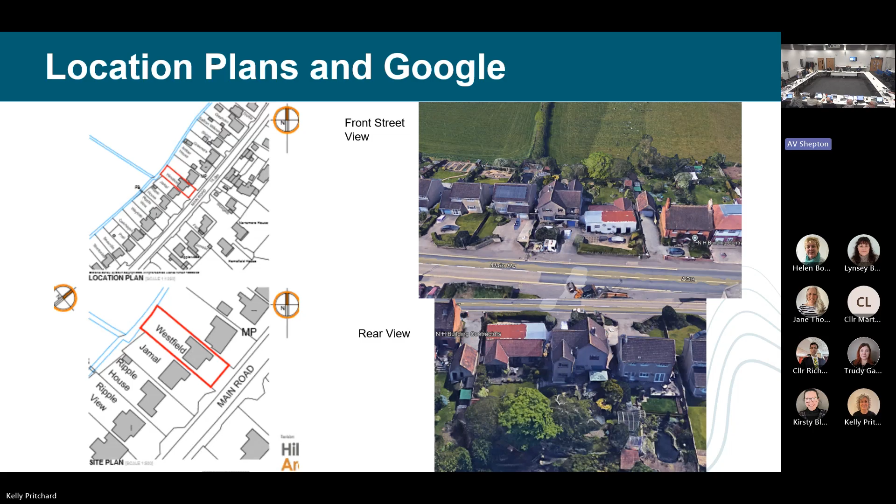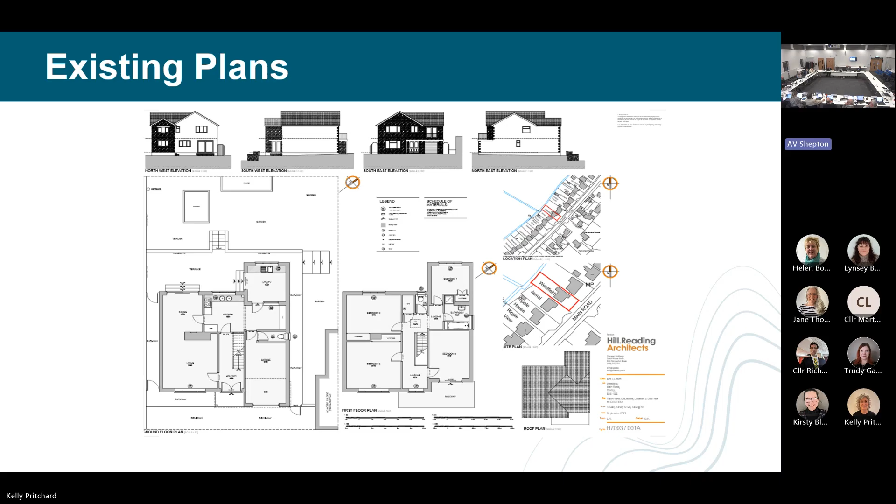Right, thank you, Chair. This application refers to a detached property called Westfield on the main road in Coxley. It's inside the settlement limit, and to the northeast the applicant owns an ancillary building which is just outside the red line on the plan there. These are the existing plans, and the application proposes the conversion of the existing garage, which is attached to the property, to additional accommodation for the house. It proposes a 2-storey rear extension and an extension at the front. The issue with this application is mainly around the rear extension.

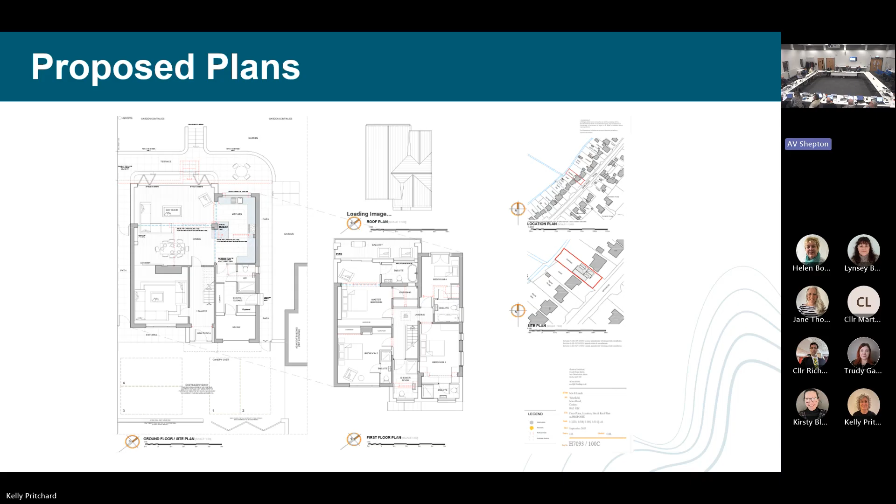I don't know whether you can see those plans there at the top. This is the extension here, and obviously this is the first floor that goes above it. And the reason that this is contention, in my view, is that there's a balcony involved in this development. You can see the existing elevations on the top row there, and then the bottom 4 are the proposed. And in the northwest you can see that balcony proposed on the rear. Now, as far as all other issues like scale, design, materials, they're all acceptable. There's no impacts on highway safety, ecology, or anything like that. The key issue here is about the overlooking potential from the balcony to the neighbouring property.

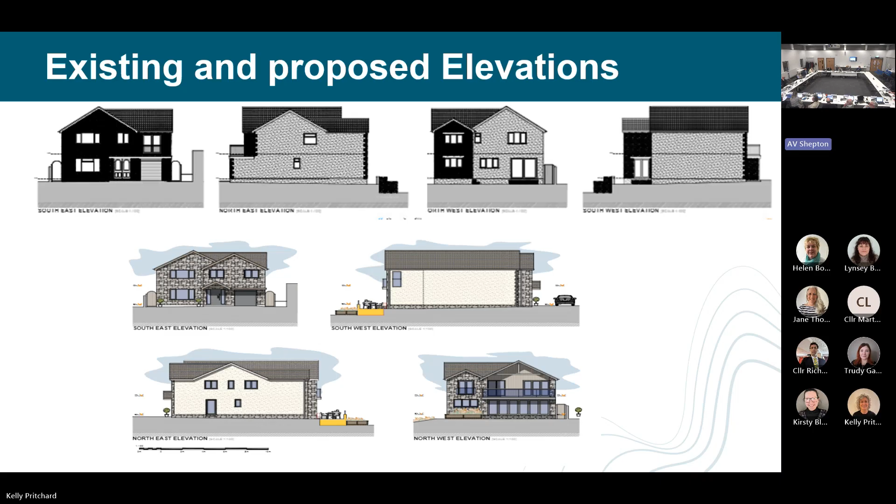I've just zoomed in on the balcony there so you can get a feel for it, and the applicant has gone some way to try and address the concern by putting obscure opaque glazing on the side that would face directly over the neighbouring property. But as you can see, the balcony projects, the glass area projects forward of the stone pillar by 40 centimetres. So anywhere really on that balcony, even if you're sat in those chairs, you will have a view of the neighbouring property.

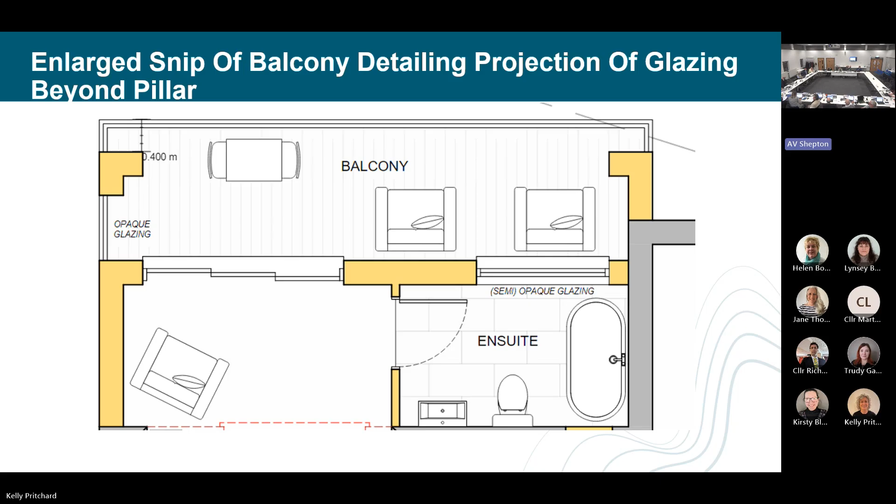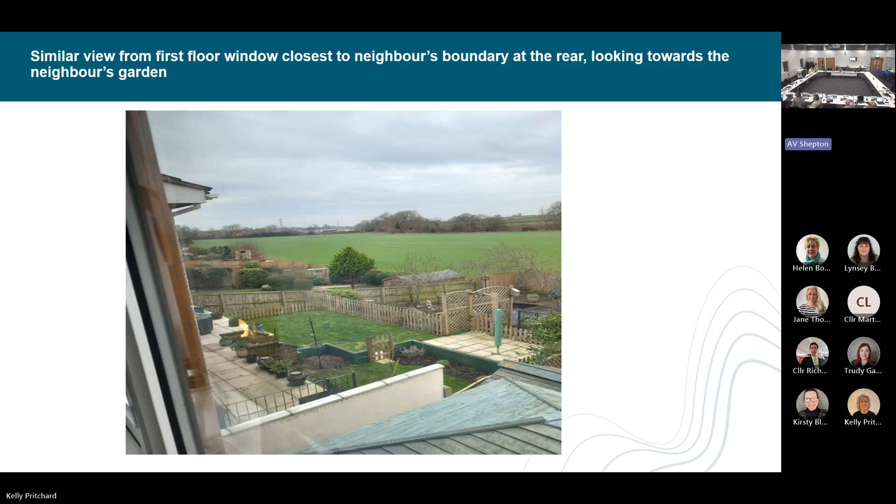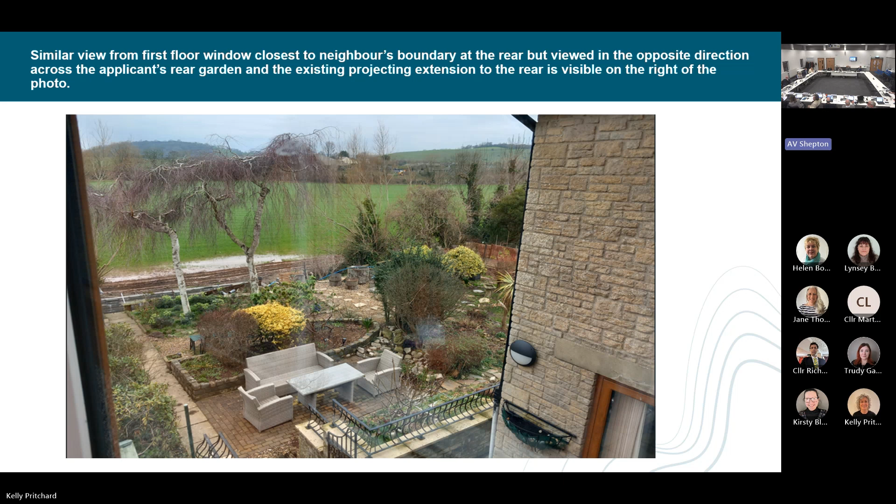That's another picture of the projecting gable of the house with the brown windows, and that's the neighbouring property, as I said, with the white windows next to it. This is a view from the window that's recessed of the property, so closer to the neighbour's boundary, and that's looking across into the neighbour's garden. That's another view from the same window, looking across into the neighbour. And again, you can see that the gable on the right is the window furthest down the bottom of the garden. And that is a view from that projection that we talked about, so that's the window furthest away from the balcony, looking across the garden.

So it's recognised that there are some overlooking issues already, but as I said, I think the nature of the use of the balcony will result in overlooking of that neighbouring property, and that's why we're recommending refusal. Thank you, Chair. Okay, thank you very much indeed. Shall we then go on to the one speaker on this? I believe the applicant, Emily.

Chair, members of the committee, thank you for the opportunity to speak. I am the applicant for this proposal, and I would like to briefly explain the thinking behind the rear balcony and why we believe it would not result in an unacceptable loss of amenity.

Firstly, I would like to note there have been no objections from neighbouring properties, and we've also spoken directly with the neighbours most closely affected, who have confirmed they have no concerns with the plans. In addition, the Parish Council have formally recommended approval and specifically recorded that there are no concerns regarding overlooking or loss of privacy. The location of the balcony is important.